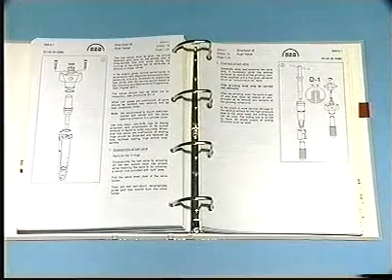Overhaul of fuel valves on 26, 35 and 42 MC engines. See Instruction Book Volume 2, Procedure number 909.

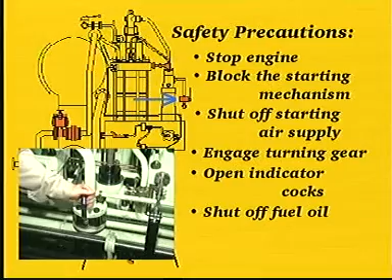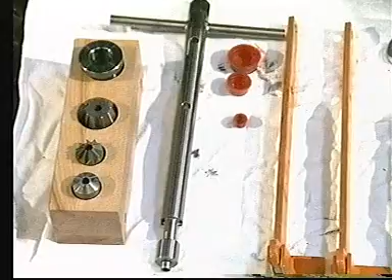Before any dismantling, drain the fuel oil from the fuel oil high pressure pipes. Using a spanner, loosen the coupling pieces fitted on each end of the high pressure pipe.

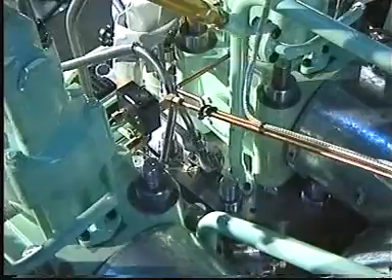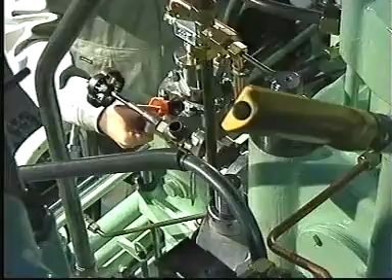Remove the high pressure pipe. Take care not to damage the high pressure pipe seatings. Once the fuel oil high pressure pipe has been removed, insert plastic plugs, both to prevent damage and to prevent dirt from entering the orifices.

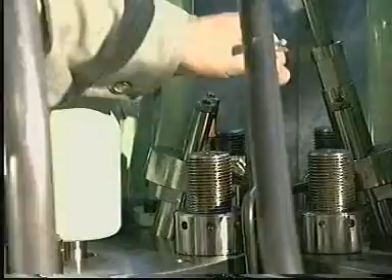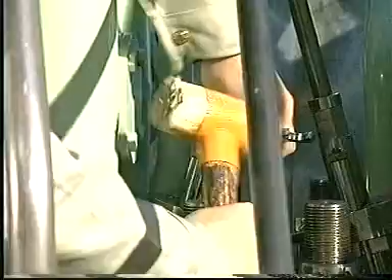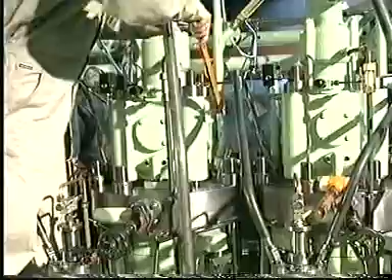Unscrew the fixing nuts and remove the spacers. Remove the fuel valve from the cylinder cover using the lifting tool if the valve sticks.

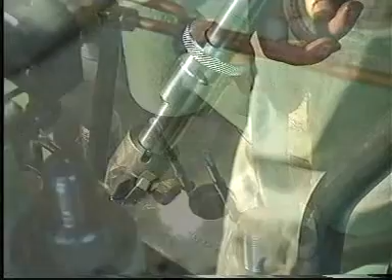Thoroughly clean the fuel valve bore in the cylinder cover. Clean off any carbon deposits in the fuel valve bore with a carbon cutter.

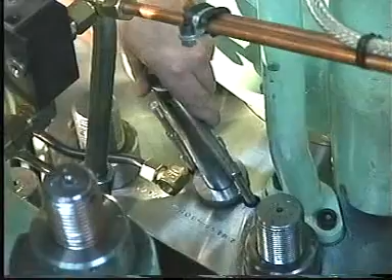If marks are found on the seating in the bore, recondition the seating with a seating face cutter. Grind the seating with a grinding mandrel and a grinding compound, for example carborundum number 200.

After milling and grinding, thoroughly clean the bore and seating and check again that there are no signs of damage on the seating.

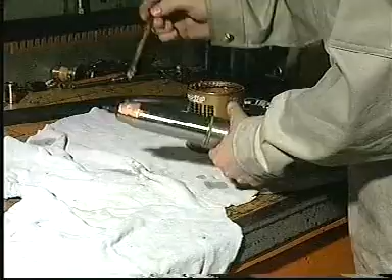After reconditioning the seating in the bore and thoroughly cleaning both bore and seating, fit new O-rings on a new or overhauled fuel valve which has just been pressure tested and lubricate with molybdenum disulfide.

Carefully mount the valve in the cylinder cover. Mount the spacers and nuts.

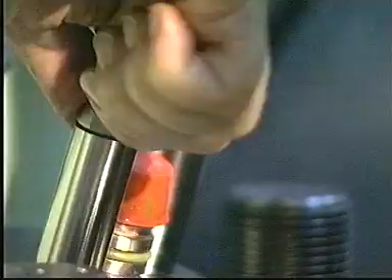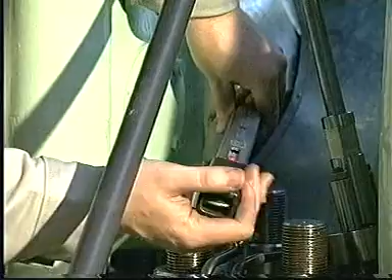Adjust the torque spanner to the value indicated in procedure number 901. Tighten the nuts using the torque spanner. Reconnect the return oil pipe to the fuel valve.

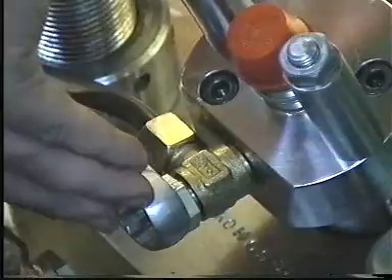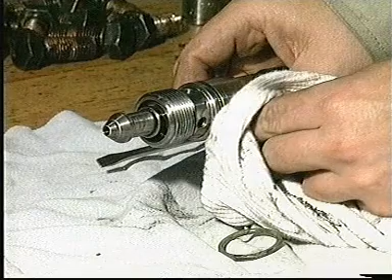Check that there are no marks on the seating surfaces of the fuel oil high pressure pipe. If necessary, recondition the seatings as described in procedure number 909.

For the fuel oil high pressure pipes, which are provided with a steel armoured protective hose, also check the adjustment of the thrust bushing. See procedure number 909.

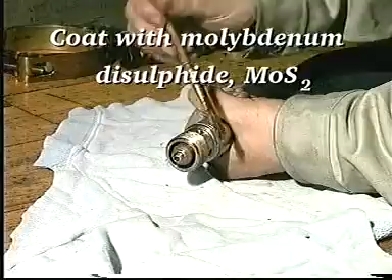Replace the O-rings and coat with molybdenum disulfide. Mount the fuel oil high pressure pipe.

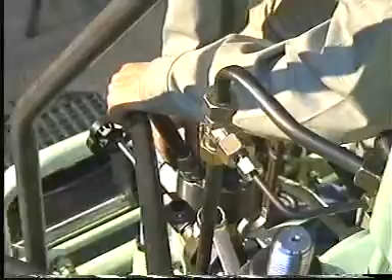Adjust the torque spanner to the value indicated in procedure number 901. Tighten the coupling pieces using the torque spanner.

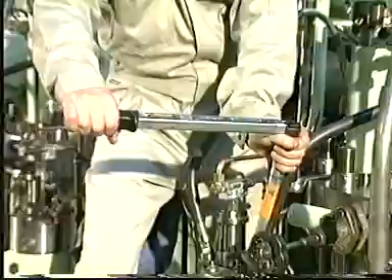Turn on the fuel oil supply.

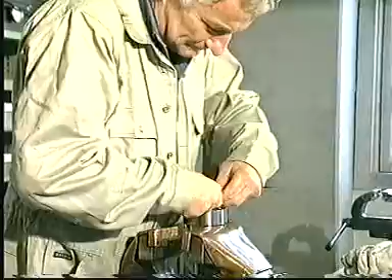Remove the sealing rings and the plastic plugs. Set up the fuel valve in a bench vise provided with soft jaws. When overhauling fuel valves, handle all parts with the utmost care and keep them completely clean.

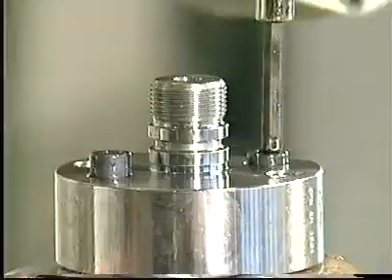Start disassembling the fuel valve by screwing off the two inside hexagon screws. Remove the valve head from the valve housing. Remove the non-return valve and spindle guide from the valve housing.

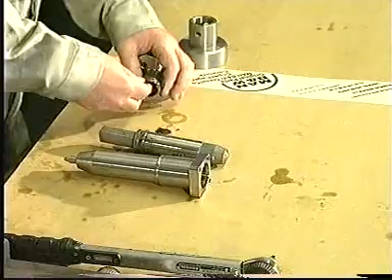Remove the sealing rings from the non-return valve and the valve head. Disassemble the non-return valve using the special tool.

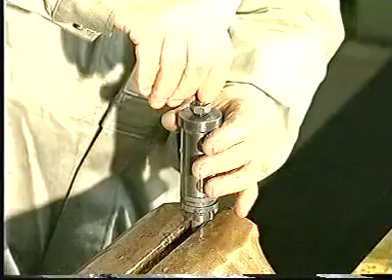Mount the extractor on the non-return valve, taking care not to tighten the screw against the slide inside the non-return valve. Remove the thrust piece.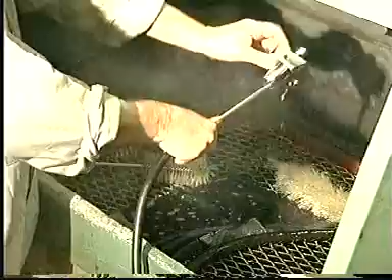Clean all parts in gas oil and blow clean with compressed air.

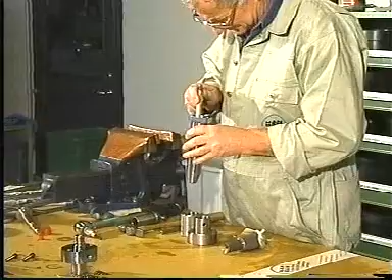Carefully clean and examine the parts and, if necessary, grind the seating surfaces with a grinding mandrel and carborundum number 500.

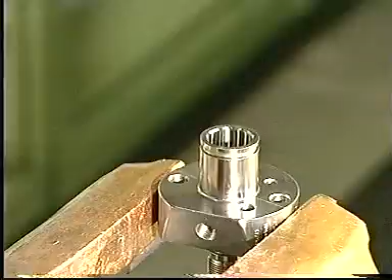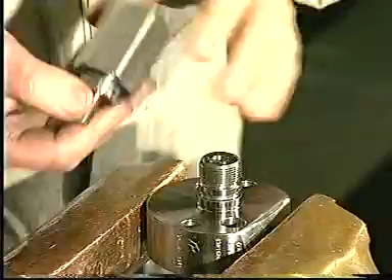Use the milling tool if more serious damage has occurred on the seating surface for the high pressure pipe in the valve head.

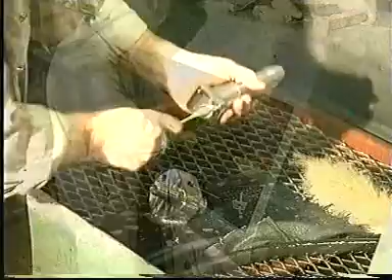Use ample amounts of cutting emulsion. The diameter of the seating surface must not exceed the value stated in procedure number 909 in volume 2 of the instruction book. After grinding and milling, clean the parts in gas oil and blow clean with compressed air.

Use the special drills to clean off any carbon deposits in the central bore of the fuel valve nozzle or in the spray holes. Test the spray holes with a test pin.

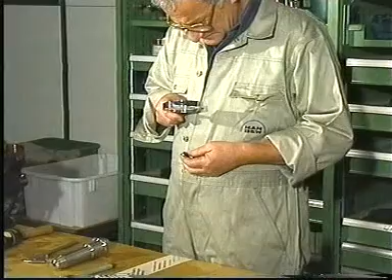If the test pin can be inserted into just one of the holes, or if the holes have become oval, the fuel nozzle must be discarded.

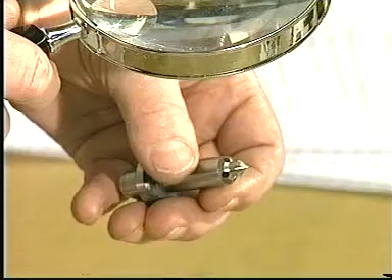Examine all seating surfaces of the non-return valve and spindle guide through a magnifying glass with an 8 to 10 times magnification. If there are pressing in marks or the like on the seats, mount a new non-return valve or a new spindle guide. Lapping of the internal seatings is not acceptable.

Defective parts, with the exception of the two springs, cannot be replaced individually. Remove any deposits on the sliding surfaces with a grade 360 emery cloth and oil.

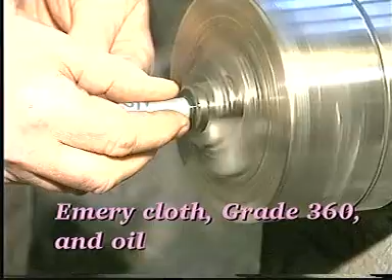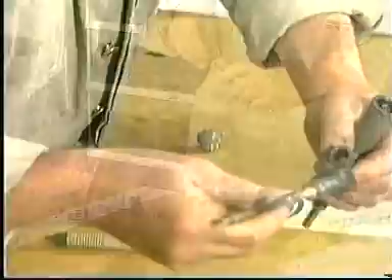Lubricate all movable parts with molybdenum disulfide. Loosely assemble the parts of the non-return valve and then press them firmly together by gently tapping them with a nylon hammer. Mount a new sealing ring on the non-return valve.

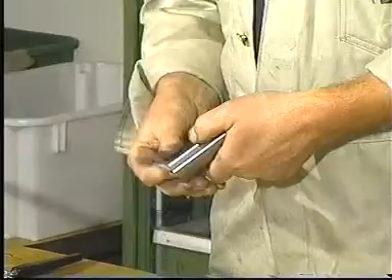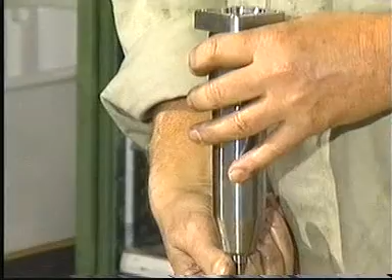Mount the special tool and assemble the non-return valve and spindle guide. Mount the fuel nozzle in the valve housing, making sure that it engages correctly with the guide pin. Mount the non-return valve and spindle guide assembly in the valve housing.

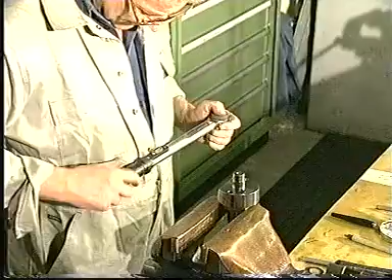Mount new sealing rings in the valve head. Mount the valve head, ensuring that the guide pin between the valve housing and valve head is correctly engaged so that it will prevent the parts from turning in relation to each other. Adjust the torque spanner to the value indicated in procedure 909 in volume 2 of the instruction book.

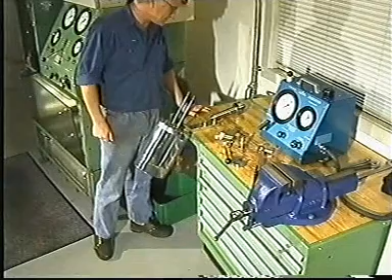Tighten the screws using the torque spanner. Overhauled fuel valves or fuel valves taken from stock must be function tested before they are mounted in the cylinder cover.

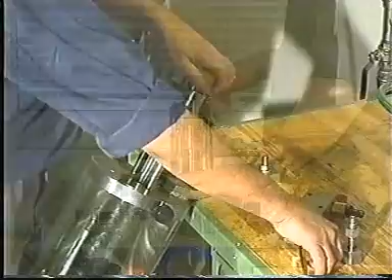Position the fuel valve in the test rig. Adjust the torque spanner to the value indicated in procedure number 901. Tighten the nuts using the torque spanner. Mount the valve with actuator handle.

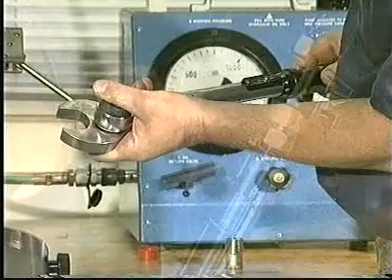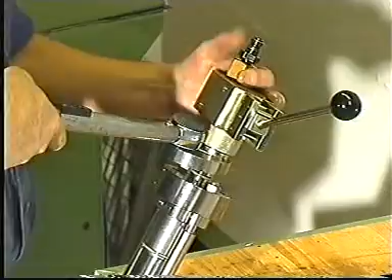Adjust the torque spanner to the value indicated in procedure number 901. Tighten the valve with actuator handle using the torque spanner. Connect the pressure testing pump and the return oil pipe to the fuel valve. For guidance on how to operate the pressure testing pump, refer to the supplier's special instruction.

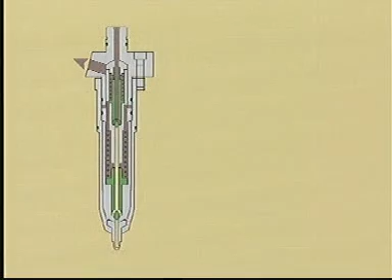Slowly fill the valve by pumping at low pressure until oil, without air bubbles, flows from the return oil pipe. Raise the pressure until it is above the opening pressure.

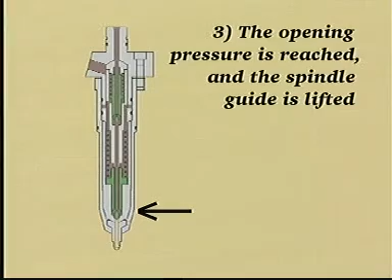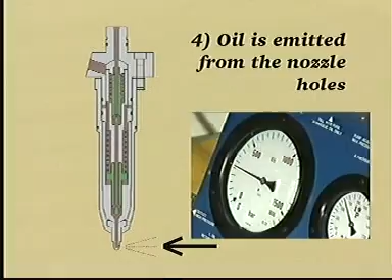Flush the valve for about 5 seconds.

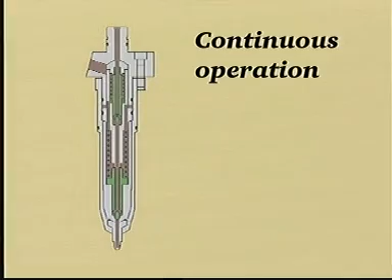Slowly increase the pressure until it is about 50 bar below the specified opening pressure. See Instruction Book Volume 2, Procedure number 909. There will always be a certain amount of oil flowing from the return oil pipe when the fuel valve is full of oil and pressurized.

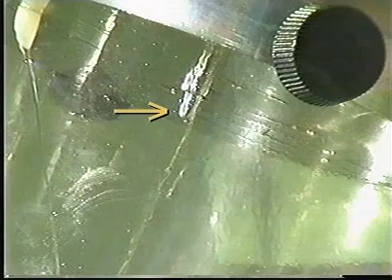Oil must not seep from the fuel valve nozzle holes until reaching a pressure of 50 bar below the specified opening pressure. If oil does seep from the fuel valve nozzles, see Procedure number 909. Lapping of the internal seatings is not acceptable.

Pump 5 to 10 strokes to fully open the valve and to blow out any dirt. Then relieve the pressure.

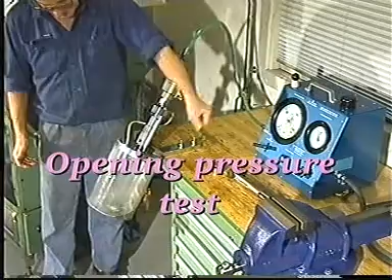Slowly increase the pressure until oil is emitted from all the atomizer holes. Read the actual opening pressure on the pressure gauge marked working pressure.

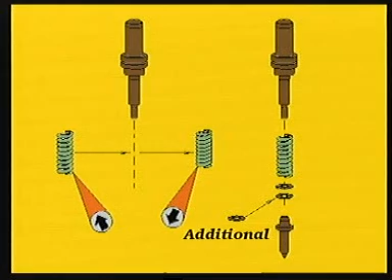If the actual opening pressure differs from the specified opening pressure, remove discs or insert additional discs under any existing discs, or replace the spring. The sum of the pressure markings on the extra discs must not exceed 150 bar. The fuel valve must be retested after any adjustment.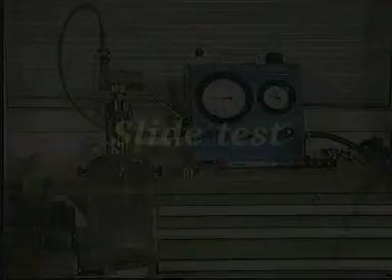If the quick pressure drop cannot be registered, the slide is sticking, or the hole is blocked, disassemble and examine the parts, replace if necessary.

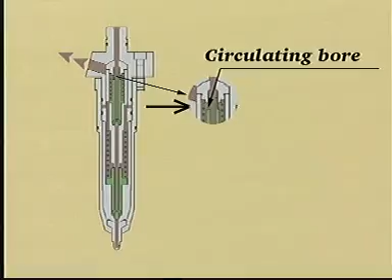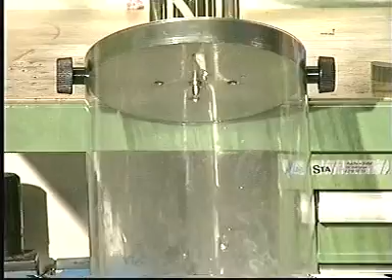Slowly fill the valve by pumping at low pressure until oil, without air bubbles, flows from the return oil pipe. Remove the return oil pipe and block the outlet hole with a gasket and a plug screw.

Increase the pressure to about 100 bar and stop the pump. The pressure should now remain at 100 bar.

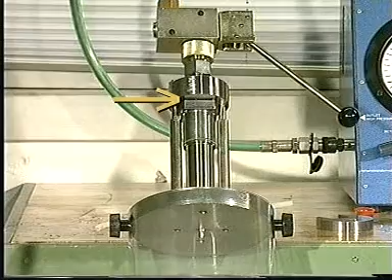If oil leaks between the valve head and the valve housing, the O-ring seal on the valve head is defective and must be replaced. If oil leaks from around the fuel valve nozzle or nozzle guide pin, the O-ring seal on the non-return valve is defective and must be replaced.

After the fuel valve has passed all the tests, it can be mounted in the cylinder cover.